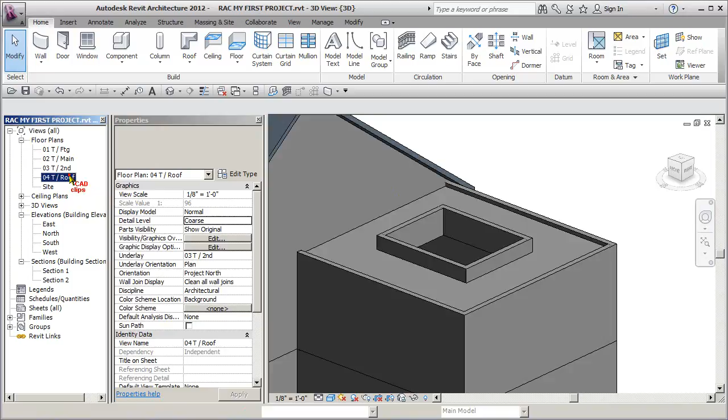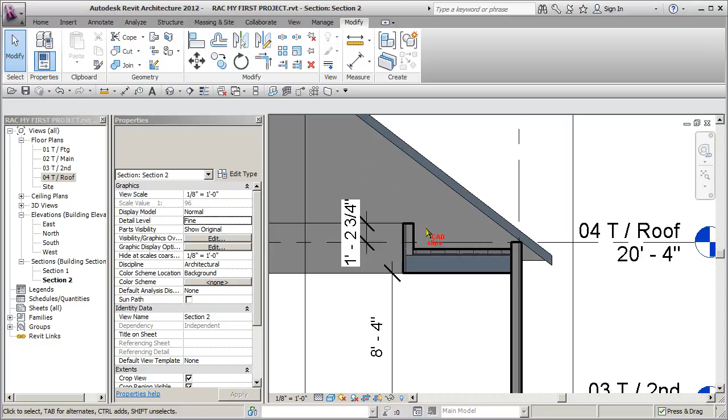And so now what we want to do, let's go back to our roof plan. Let's have a look at our cross section that's going through here. Okay, I just want to have a look at the distance. Let's add another little dimension in here from the top of roof to the top of my little curb wall: it is 14 and 3/4. Escape. Okay, so 14 and 3/4, that's where I'm going to have my new roof. So I can go up to here

and I can start it like a normal roof by footprint. Home, roof by footprint. Okay, we might as well set this right off the bat at 14.75 inches. That's going to be the vertical offset off of the roof because I'm starting on the roof level. I want to have a 0 overhang, so set that to 0 if it's set to be 2 feet from your previous roof. And here is the most important thing: to make it glass, we have to say edit type.

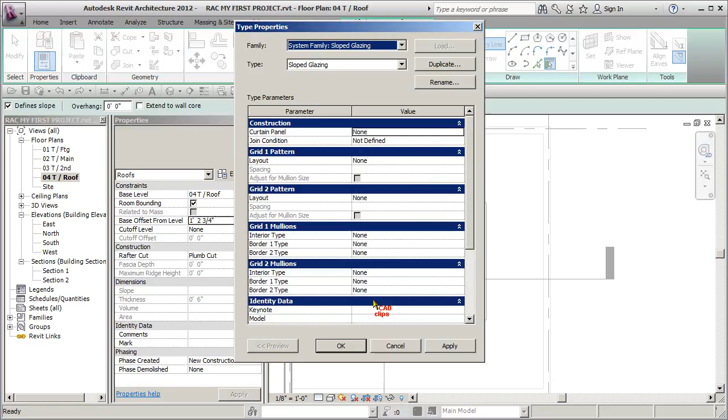And then in here, instead of system family basic roof, we're going to say system family sloped glazing. Okay, don't pick it in under here. You have to pick it here first. Okay, you can preset your mullions inside of here if you want. I'm not going to worry about that for now. So I hit OK. So now I have the sloped glazing. I have the right level. I have the vertical offset.

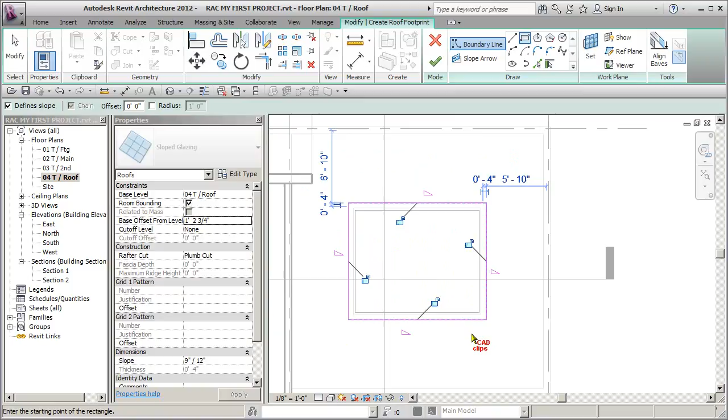Okay, no overhang. I can use the pick walls option, but I'm just going to use a rectangle tool with an offset of 0. Click, click. Okay, that's it. Escape on the keyboard. Hover over here, tab, click to select all those lines. Remember to chain select: hover, tab, click. Take the slope off. Oh, actually I do want slope on there. I just want to make sure they're all set to be 9/12. So really that's it. It's just sloping all 4 sides at the right level.

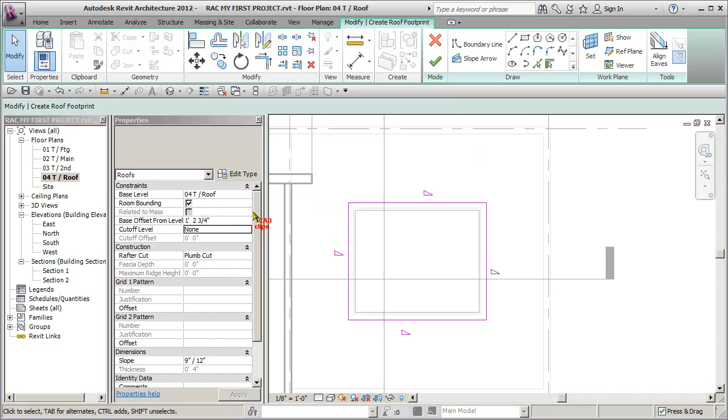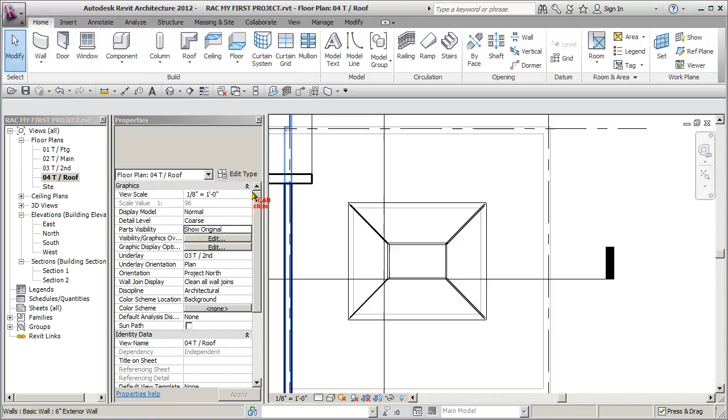Hit OK. Would you like to attach the walls that are going up to the roof below this? And we're going to say no, and you should almost always say no on that. Okay, click out. Now it looks like there's a flat spot on the top, and that's only because the view range that I'm set in here on the top of roof is clipping the roof. That's why it's also clipping this roof over here.

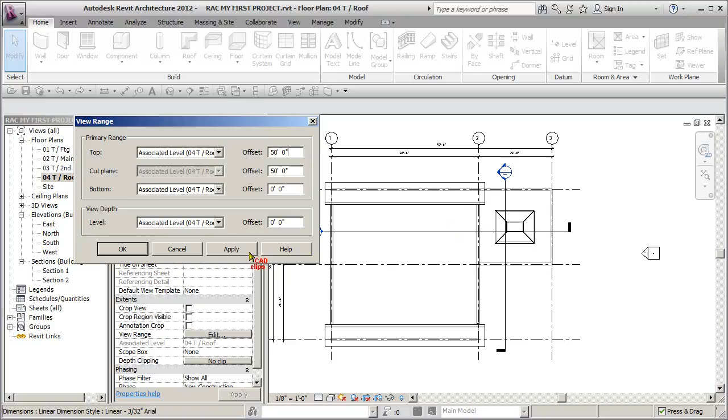Okay, so we should probably just change that by going down here to our view range. If this is a roof plan, what we want to do is bump that cut plane up to be about 50 feet up, and this has to be at least the same. Okay, so the cut plane has to be above this roof to not clip it, and this cannot be below that. So we hit apply on that, and all of a sudden it looks more like a roof plan. 3D on the keyboard. Okay, go to our 3D view.

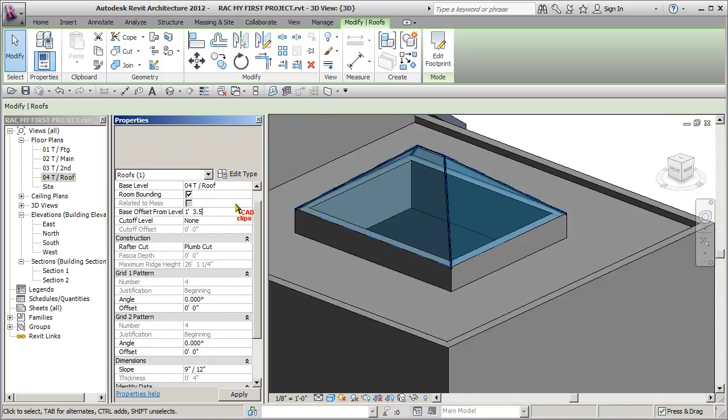There's our sloped glazing in the lightest format. Okay, and it looks like it could even go up a bit. Let's click on there. Let's make it 1 foot 3.5 and see if that comes up a little bit. That looks a little better. Okay, so now that we have that, what we need to do is to slice this up using our curtain wall mullions and grids. So right now it's a roof, but it's a special roof because it's using sloped glazing.

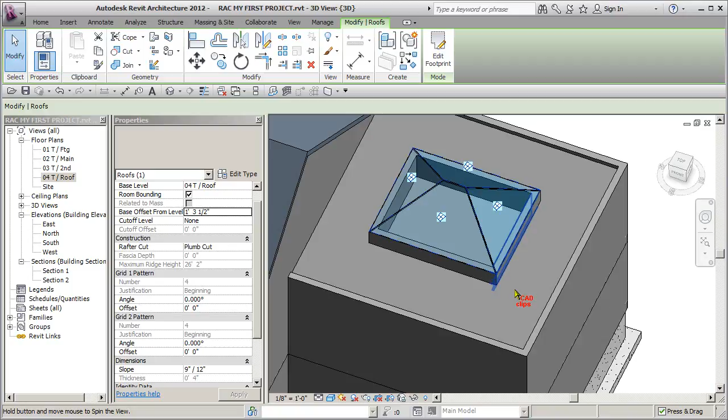So I'm in a 3D view here. So I'm going to just click top and make it a nice flat 3D view. Click out. Okay, isn't that nice? So you can pick on here anytime you want. Pick your corners and zoom around. Use this view cube to pick points on there. Or you can just hit top and it'll do that. If you're zoomed in, it'll even stay zoomed.

So now what I want to do is add in what are called some curtain grids, and then I'm going to turn those curtain grids into mullions. Watch, curtain grid. Revit's smart at finding the halfway points between things, first of all. So if you pick near an edge, it'll find the middle point. So see 5'6" on each side. Click, and then go to the other side. You move your mouse around, click.

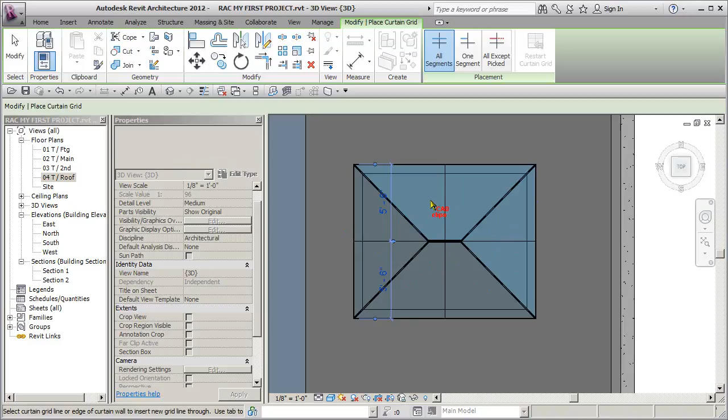Okay, now to do this one, you might have to go down to the bottom, click, over to the bottom here, click, and then go to the halfway point here. They like to snap to each other, the curtain grid lines. Okay, escape, escape. So that just forms what are called the grid lines. It kind of slices it up a little bit. I'm using shift middle mouse button here again. Shift middle mouse. Okay. So now I can populate those grid lines with actual mullions.

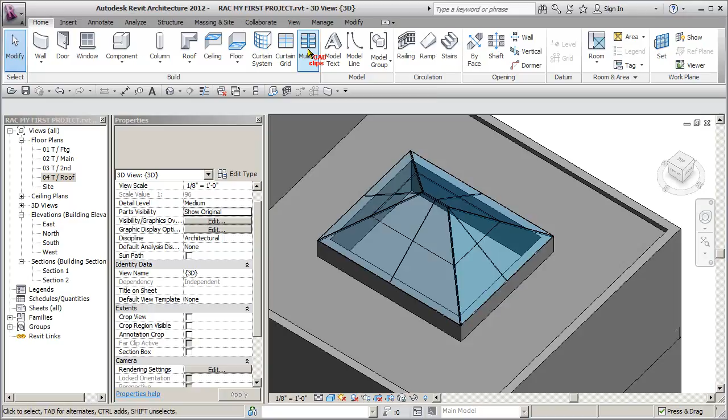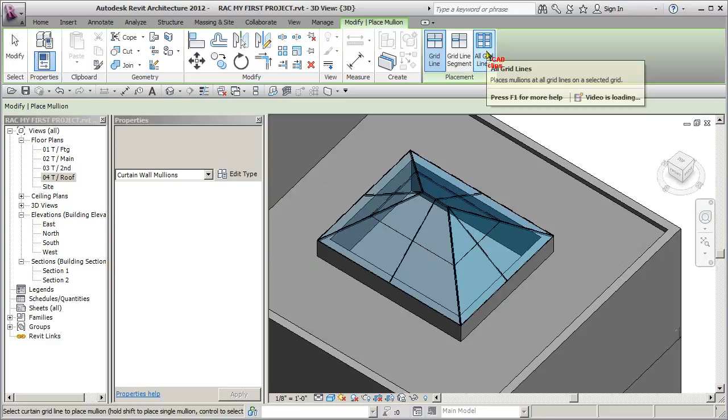So now I go mullion, and I want to pick on here. I don't want it to be too big. It might be set by default really big. So really 1 inch square is almost too small. So we'll go 1.25 by 2.5. And you can make all different sizes. So that's clicked on there. And now I can do one grid at a time if I want, and then change my size, etc. But I'm just going to say all grid lines.

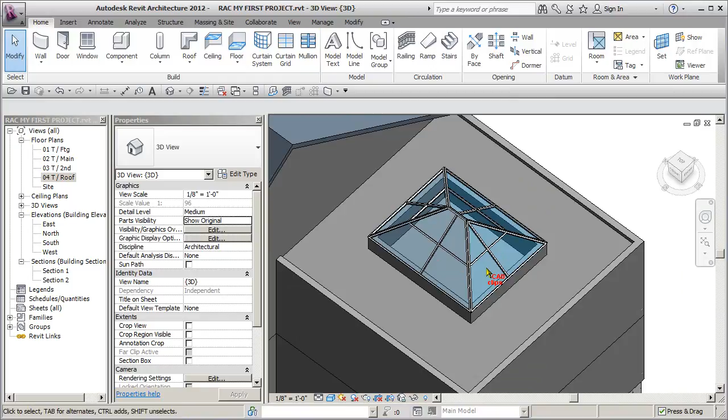And I'm going to pick this face and go click. It's going to add them in. Hover here, click, adds them in. Hover, click, adds them in. Hover, click, adds them in. Escape, escape. Okay? So all I did was start the mullion tool. I picked my mullion. I said all grid lines, and then hovered over each face. And there you have it. There's your glass roof. Go up to my roof plan.

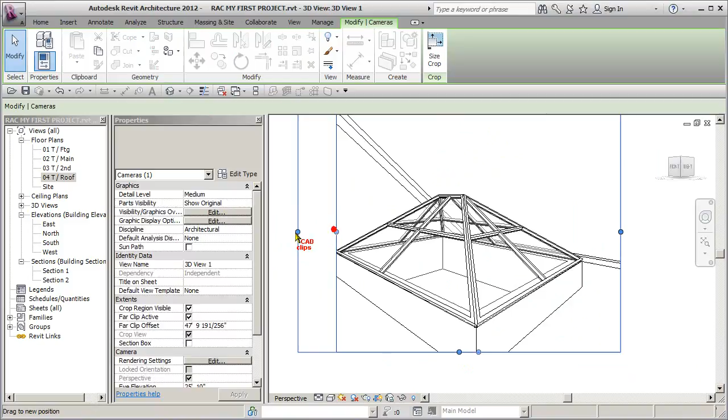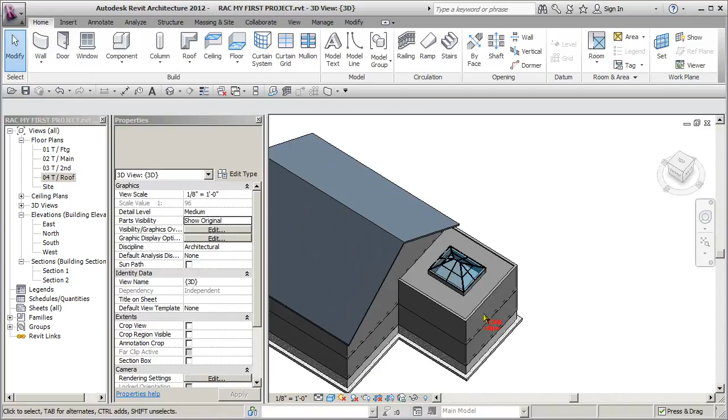Maybe it's time to do a little camera view here. So we go to our 3D view and say camera. What would it be like standing right up on here looking at our glass roof? Pick on there. Do a little render, do a little backdrop. 3D on the keyboard. We don't really have any materials on here, so we're not going to get any effect, but you can pick on there and then swivel once you're inside that perspective view. So there's our little glass roof, and we're ready to move on to the next stage.